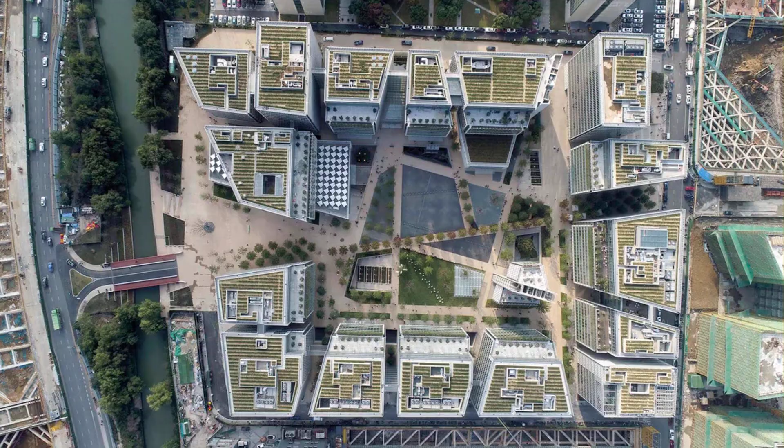Engineers responded with what engineers always reach for: bigger pipes, deeper tunnels, more pumping stations. And the floods kept getting worse. So China tried something that, when it was first proposed by landscape architect Kongjian Yu, struck most city planners as either decorative or delusional. Rather than building faster drains, retrofit cities to hold water the way a wetland does. So how did a country that paved its floodplains into oblivion attempt to turn its megacities into sponges? And what happened when reality tested the idea?

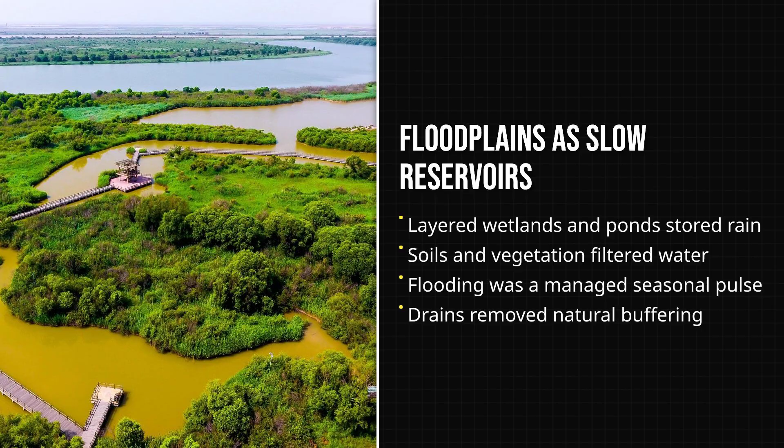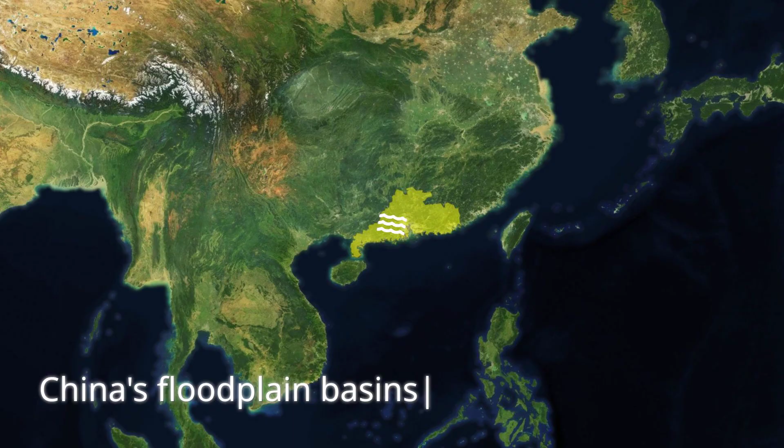Before Chinese cities were cities, the land they were built on did something that no drainage engineer has ever fully replicated. Natural floodplains were not flat, dry land that occasionally flooded. They were storage systems, layered with wetlands and shallow ponds that filled gradually during rain, then released water slowly over days and weeks as soil absorbed, plants transpired, and channels carried the overflow at their own unhurried pace. The Yellow River Valley, the Yangtze Basin, and the Pearl River Delta all developed over thousands of years inside landscapes that treated flooding as a controlled rhythm, not a catastrophe to be expelled.

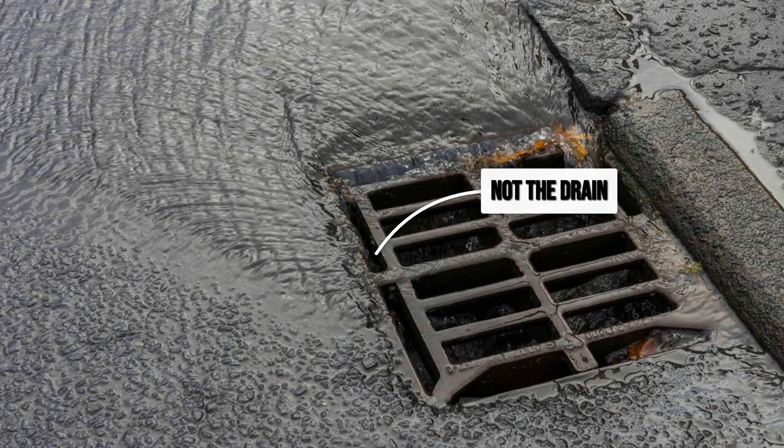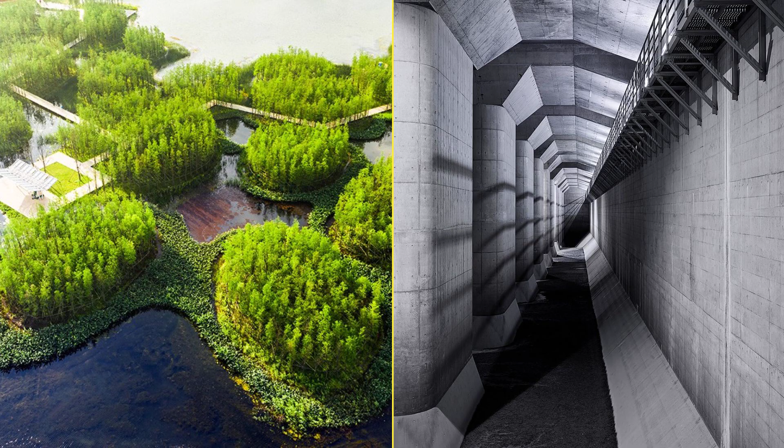Water moved through those landscapes slowly because it had places to go that were not the drain at the end of the street. It soaked into permeable soils that held it for weeks before reaching groundwater. It pooled in natural depressions that stored it through dry spells and released it through evaporation during heat. It filtered through root systems and wetland beds before entering rivers. Urban flooding became catastrophic not when rain intensified, but when that whole web of delays and detours was replaced with a single instruction: get the water out as fast as possible.

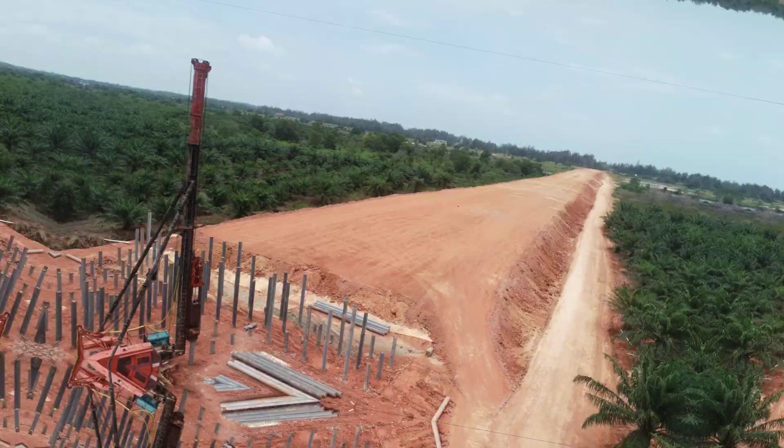The replacement happened with stunning speed. Between 1980 and the 2010s, China built more urban infrastructure than any nation in human history, and the tools of that construction were impervious. Wetlands were drained and filled to create developable land. Rivers were straightened, channelized, and walled in concrete to increase flood-carrying capacity and free the banks for roads and buildings. Permeable soils were sealed under roads and plazas designed to shed every drop of rain without absorbing any of it.

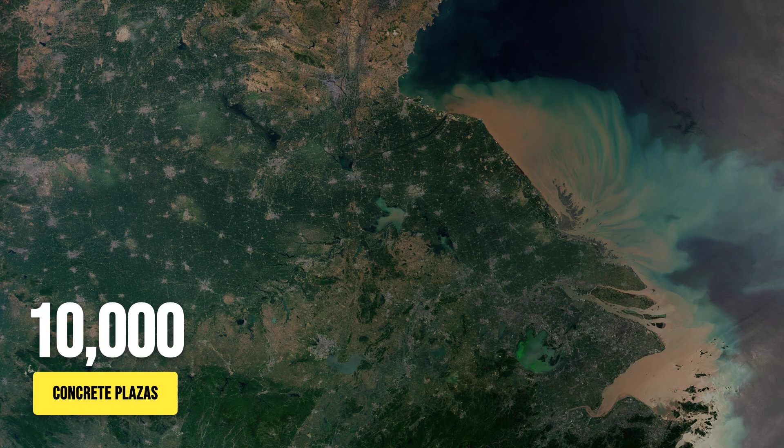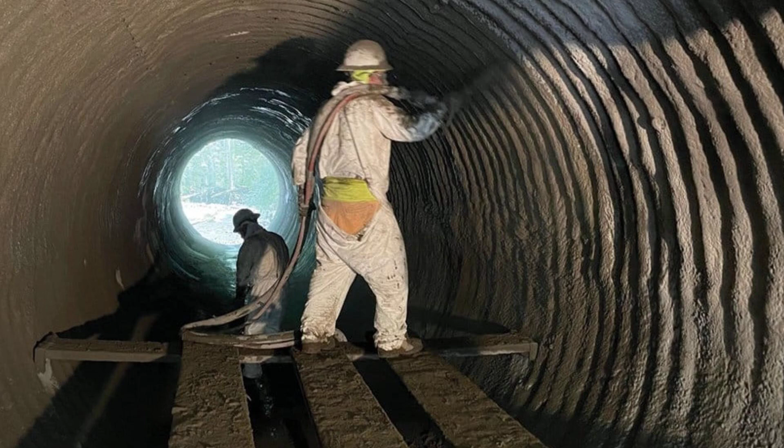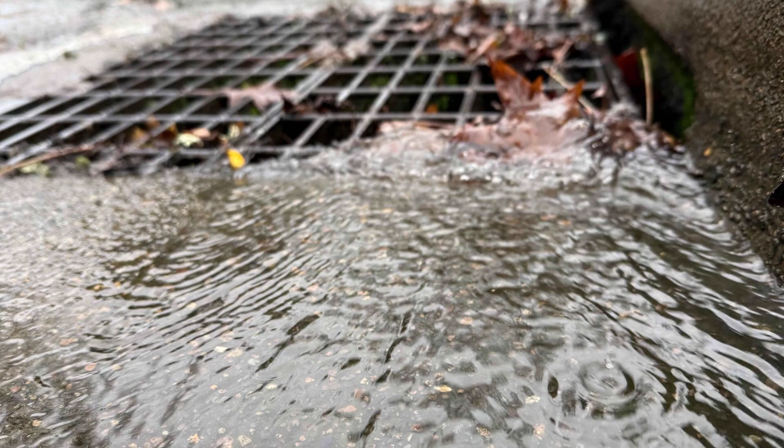A concrete plaza in front of a building meant no muddy ground, no flooded entrances. But 10,000 concrete plazas across a watershed meant that every storm sent its full volume into the drainage system at once, instead of spreading it across hours of gradual infiltration. Engineers built faster drains to keep up, which worked until rainfall was heavy enough that even the fastest drains could not keep pace with the surge they had helped create. The uncomfortable truth is that drainage design, as practiced for decades, protected individual parcels by pushing the problem downstream, and did so well enough that no one had to reckon with what was accumulating at the end of the pipe. By the time the reckoning arrived, it arrived loudly.

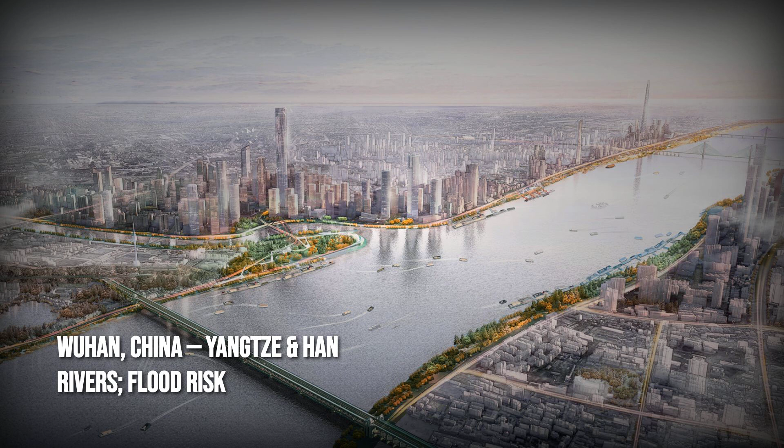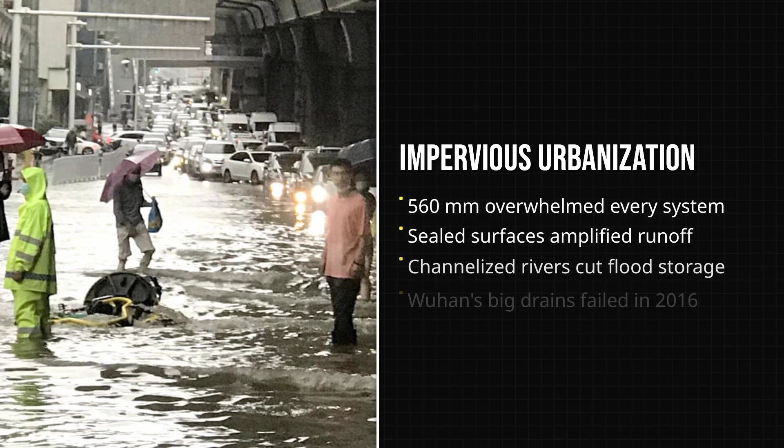Wuhan, a city of more than 11 million people sitting at the confluence of the Yangtze and Han rivers, built extensive drainage infrastructure throughout the 2000s and the 2010s. In July of 2016, more than half the city flooded anyway. A record weekly rainfall of 560 millimeters overwhelmed every system in place. Water levels in the Yangtze reached their fifth highest point on record. More than 1 million people were affected, and the economic damage exceeded 5 billion yuan.

Wuhan was one of the first sponge city pilots. Its experience was not unique. Across China's large cities, flood damage kept climbing even as drainage budgets grew, and the pattern was consistent enough that engineers had to confront an unsettling possibility.

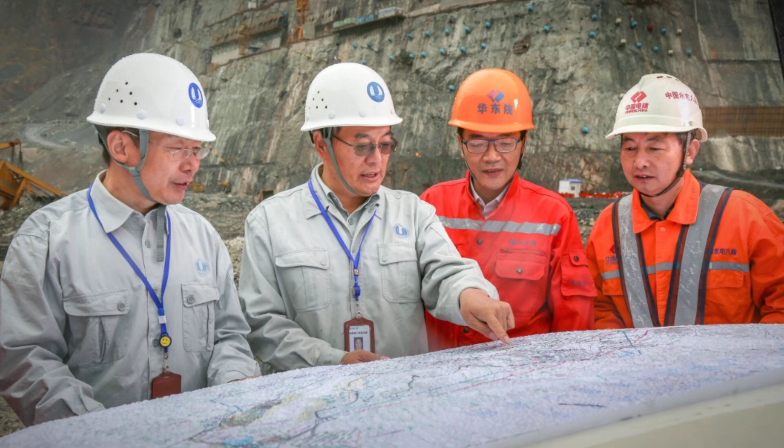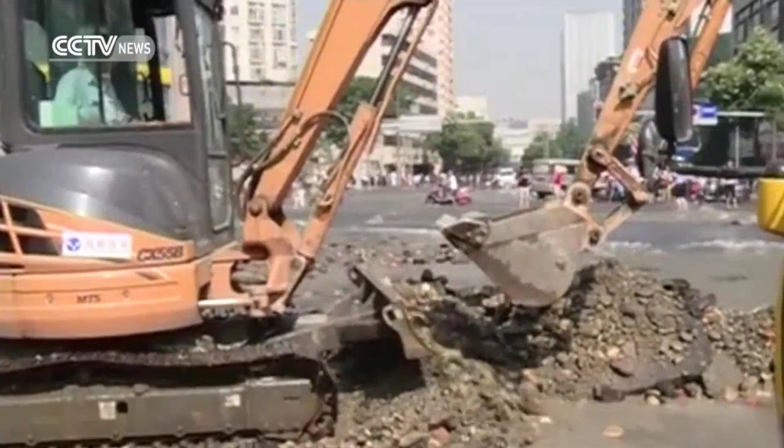The infrastructure they kept building was not failing because it was undersized. It was failing because it was the wrong kind of tool for the problem it was facing. Every fix solved yesterday's storm and failed the next one because the fundamental architecture of how water moved through the city had not changed.

When Kongjian Yu began arguing publicly in the early 2000s that China needed to stop fighting water and start accommodating it, the reaction from most of the infrastructure establishment was dismissal. The proposal was to retrofit urban environments with permeable pavements, sunken parks designed to hold standing water temporarily, constructed wetlands and retention ponds, green roofs, rain gardens, and bioswales, all connected into existing drainage networks to slow runoff, reduce peak flood volume, and release water gradually rather than all at once.

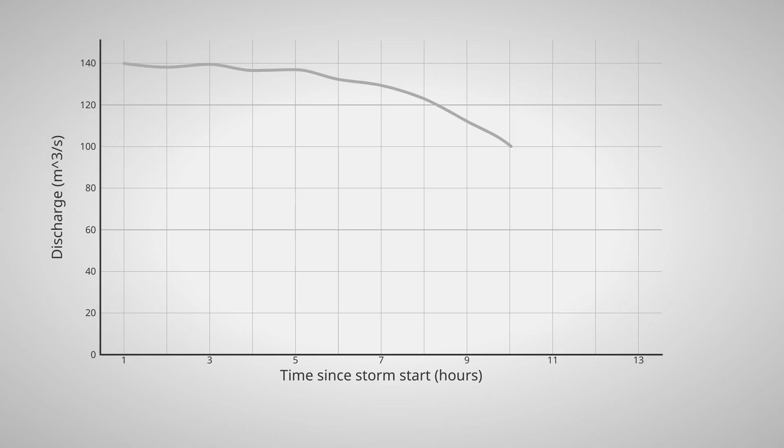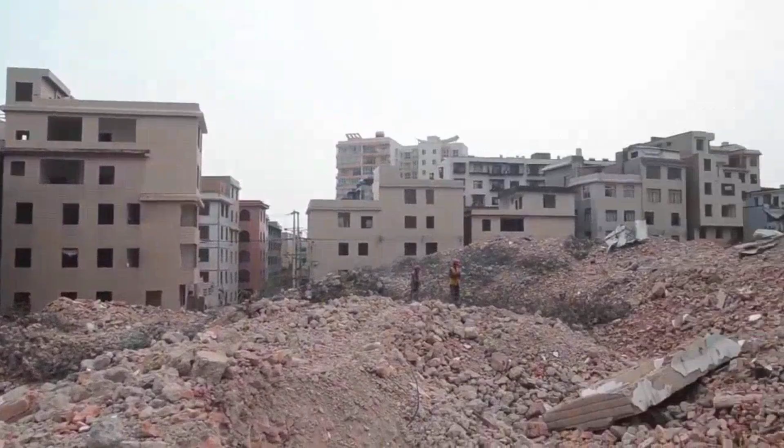Critics called it landscaping dressed up as engineering. Politicians worried that parks designed to flood would look like failures the first time they filled with water. Agencies with mandates to build hard infrastructure had no budget categories for gardens and porous pavement. And underneath all of the institutional resistance was a simpler objection. China's cities were growing, space was valuable, and dedicating urban land to nature-based water management felt like a step backward.

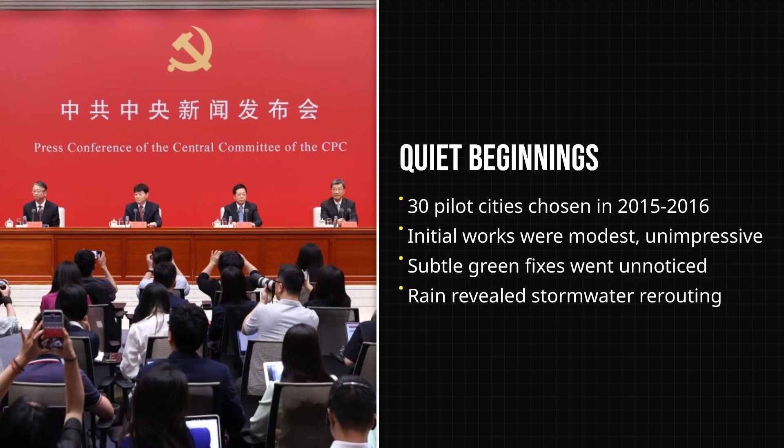If this gamble failed politically, the careers behind it would not recover. If it failed hydraulically, floods would still come and the money would be gone. In 2015 and 2016, China's Ministry of Housing and Urban-Rural Development selected 30 pilot cities and committed central government funding ranging from roughly 400 million to 600 million yuan per city per year for 3 years.

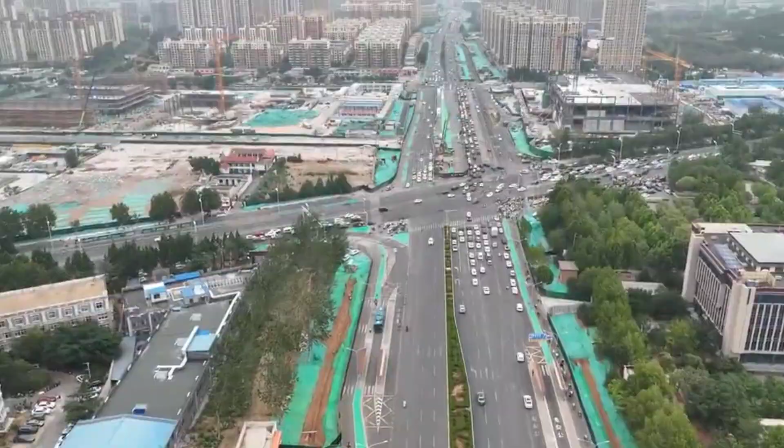Construction began. To most observers, what appeared on the ground looked underwhelming. Sunken plazas with gentle slopes, stretches of road resurfaced with unfamiliar textured paving, parks with shallow depressions and planted edges that engineers described as retention features, green roofs on public buildings. None of it was dramatic. Journalists who visited pilot districts early found it difficult to write a compelling story about what amounted to landscaping changes and road resurfacing.

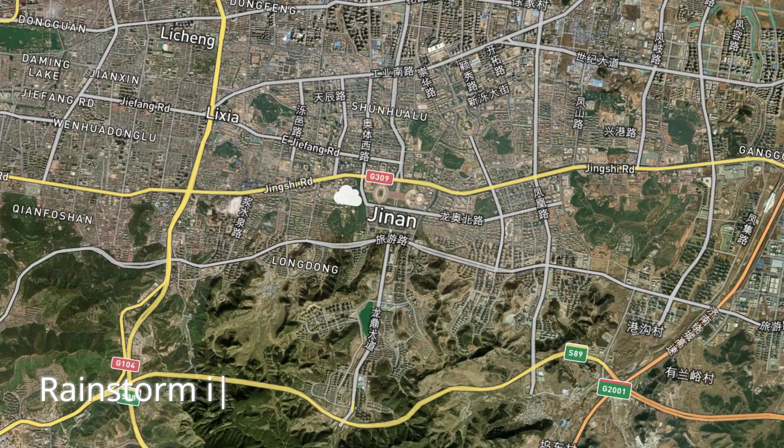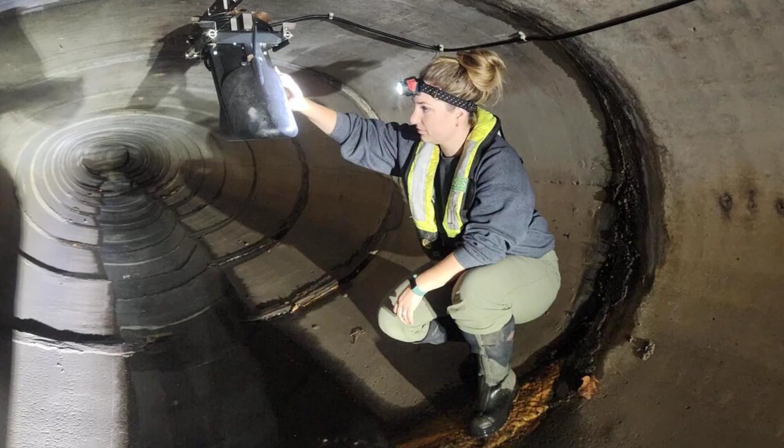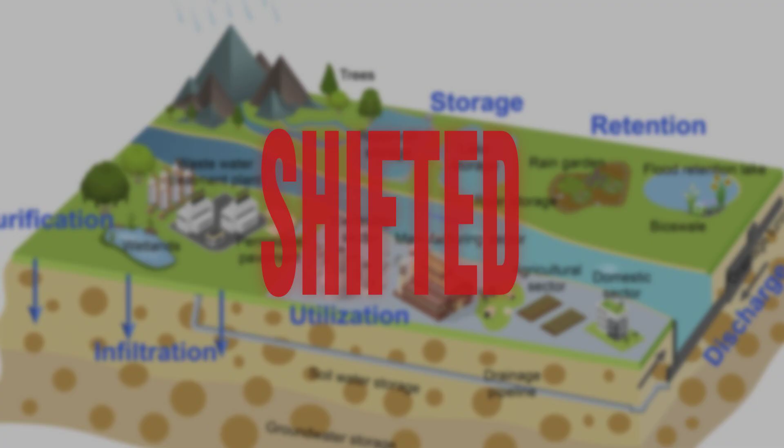Then, a moderate rainstorm passed through a sponge district in Jinan. A city drainage engineer watching from a monitoring station noticed something he had not seen before. The flow meters in the downstream pipes were barely moving. The water that had fallen on the district was somewhere else, soaking into gravel beds and pooling in depressions, and it was not arriving at the drain all at once. Something had shifted in the physics of how the storm moved through the city. The shift did not convince anyone quickly enough to stop the backlash.

In 2021, Zhengzhou flooded catastrophically despite years of sponge city investment, and the headline response was exactly what critics had predicted. The program was called a failure, a waste of public money, a project that had not solved the problem it promised to fix. Media coverage quoted residents who had watched sponge features constructed near their neighborhoods and still found water in their streets. The government acknowledged the damage, the death toll, and the inadequacy of what had been built. And the critics had a point, but not quite the one they thought they were making.

Zhengzhou's sponge infrastructure was built in specific pilot districts within a city of 9 million people. The rainfall event that hit it was far beyond what any urban drainage system is designed to manage, dropping a volume of water in a single day that approached the city's entire average annual total, hitting a watershed that had been sealed with concrete over decades. Sponge city features were never designed to handle that.

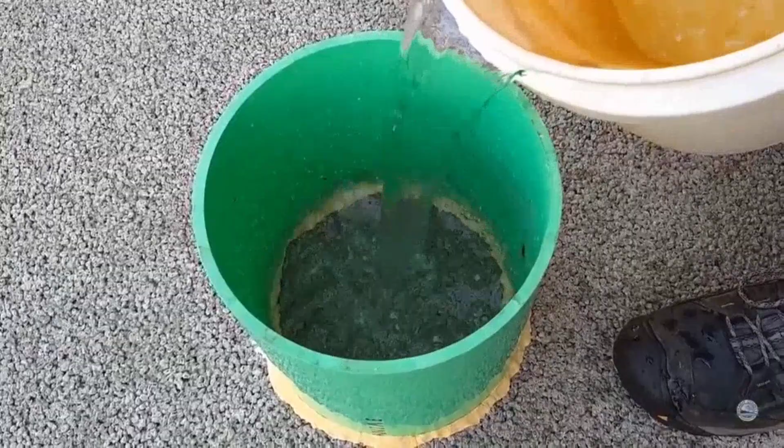The confusion, which was genuine and expensive, was between what the program promised to do and what people heard it say it would do. What sponge cities actually do is change the relationship between rainfall and flood peaks for the storms that happen most of the time. When rain falls on a permeable surface, a fraction soaks in immediately and the rest moves slowly toward the drain, arriving in a lower and longer pulse rather than a sudden spike.

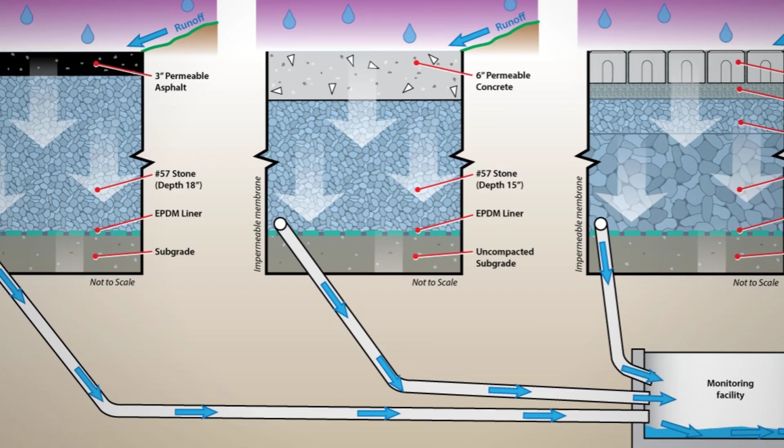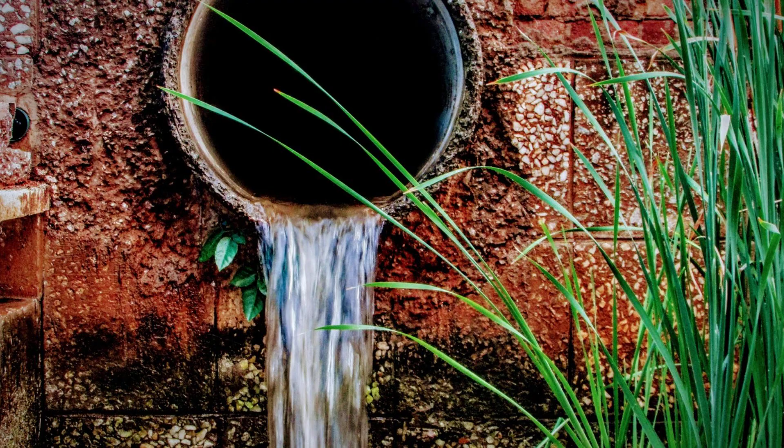Studies on permeable pavement installations in Chinese pilot cities showed peak flow reductions of between 7 and 43%, depending on storm intensity and installation quality. Sunken parks that hold standing water during a storm function as temporary reservoirs, releasing volume gradually as the storm passes instead of sending it all directly into already stressed pipes.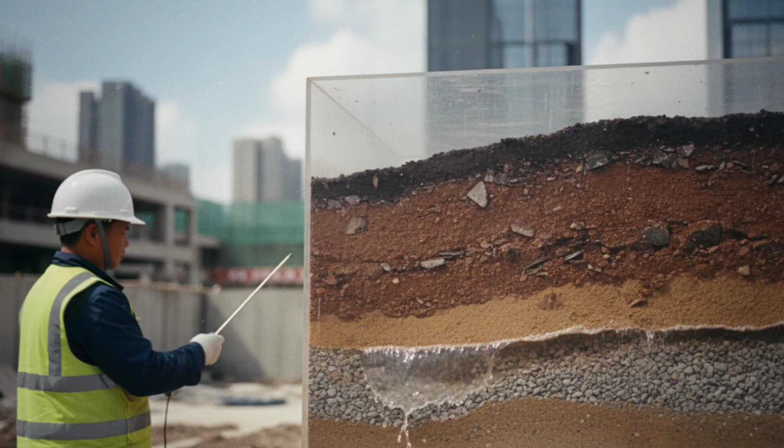Bioswales slow sheet flow along roads, filter pollutants out of runoff before it reaches waterways, and give water contact time with soil that sealed pavement never allowed. Each feature does something modest on its own. Across a retrofitted district, they reshape the storm from a sharp spike into a curve that the drainage system can manage, and the effect does not stop at flooding.

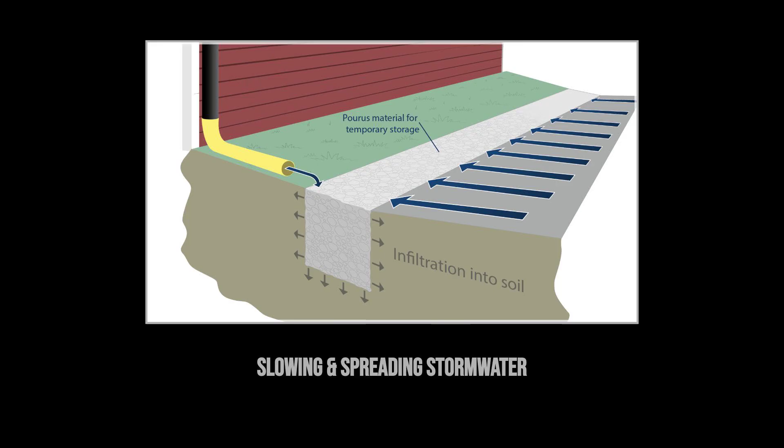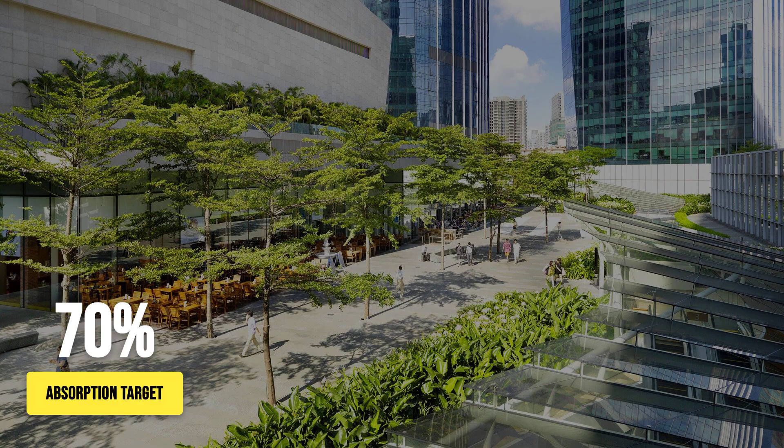Water infiltrating into soil instead of rushing into pipes recharges groundwater that cities had been depleting faster than rainfall could replenish. In sponge districts studied in Guangzhou, surface temperatures dropped by over 10 degrees Celsius in some cases compared to sealed adjacent areas, and air temperatures followed measurably. The city does not just drain better, it behaves differently in heat and drought as well as in rain.

After 5 to 10 years of operation across pilot districts, the patterns in the data became hard to dismiss. In Wuhan, more than 380 sponge projects covering parks, green areas, and urban gardens were associated with measurably reduced waterlogging during moderate and heavy storms in treated districts, along with improved water quality and documented biodiversity increases in areas near retention ponds and constructed wetlands.

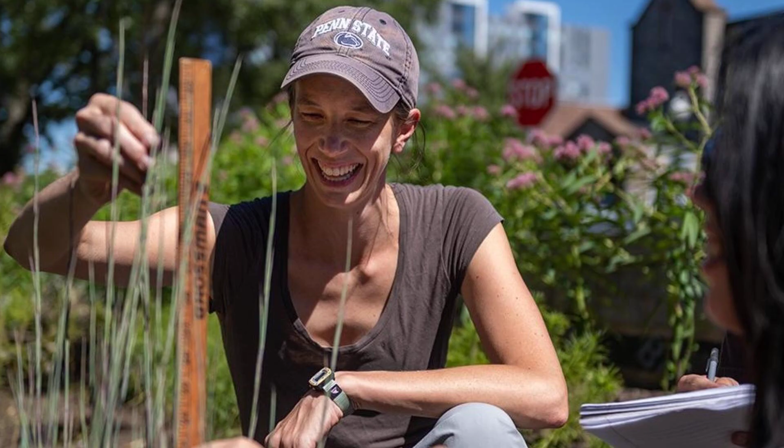A study published in early 2026 found that diversifying plant species in rain gardens and bioswales raised plant richness by more than 50% in pilot areas compared to conventional urban green spaces. In Jinan, investment in sponge infrastructure was credited with faster post-storm recovery in retrofitted neighborhoods, compared to adjacent areas still relying entirely on conventional drainage.

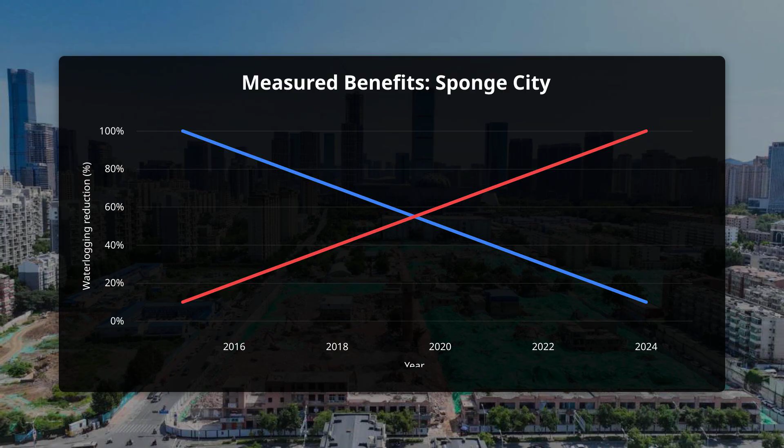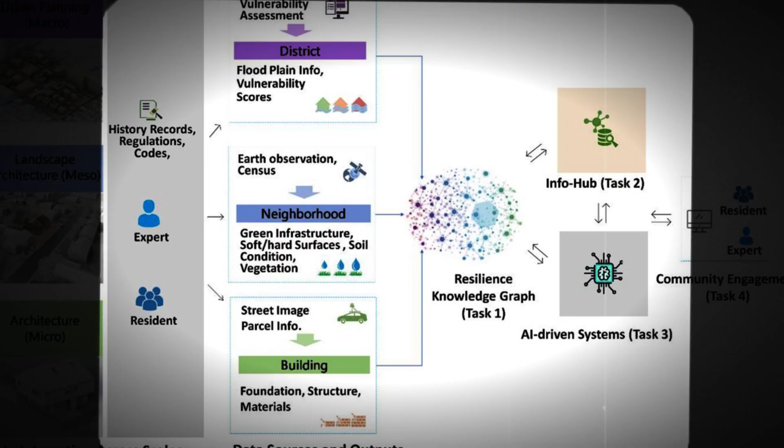A broader analysis measuring water ecological resilience across pilot cities showed consistent improvement in treated areas, modest in absolute terms but statistically repeatable across sites and years. The numbers arrived after engineers had already watched water move differently through the city, and the combination of observed behavior and accumulated data made a different argument than either the early optimism or the post-Zhengzhou backlash.

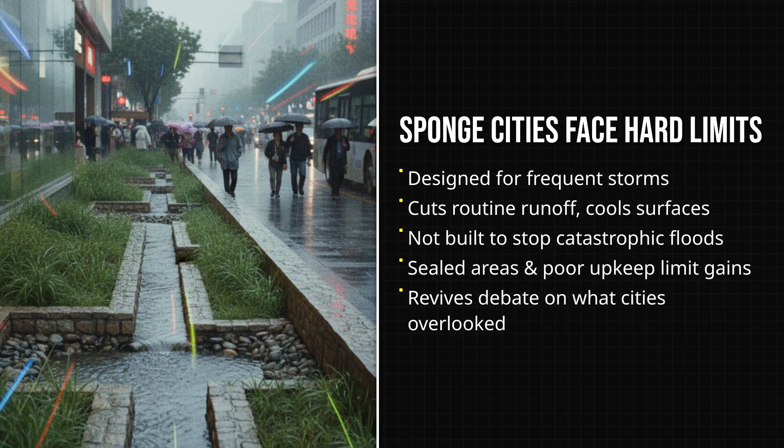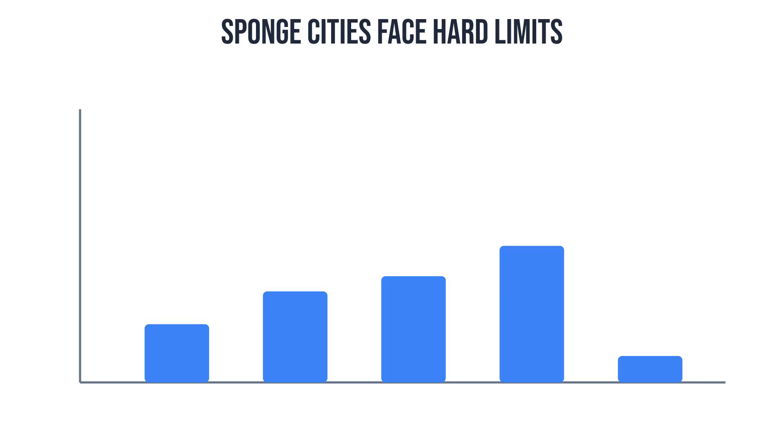None of this resolves the hard limits. Sponge city features are designed around storms that occur frequently, the common rains that account for most annual runoff and most chronic flooding. Against extreme events that are becoming more frequent as the climate changes, no amount of permeable pavement prevents catastrophic damage when rainfall volumes exceed the storage capacity of every feature in the system simultaneously. A city's flood risk is also shaped by river systems, upstream land use, and regional hydrology that sponge infrastructure cannot control from within city limits.

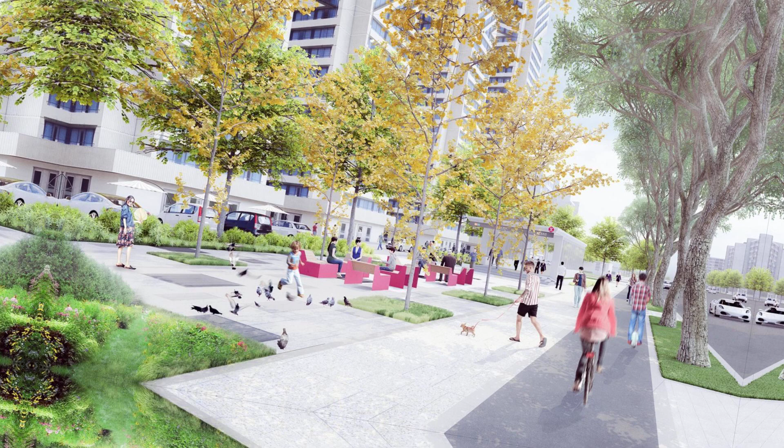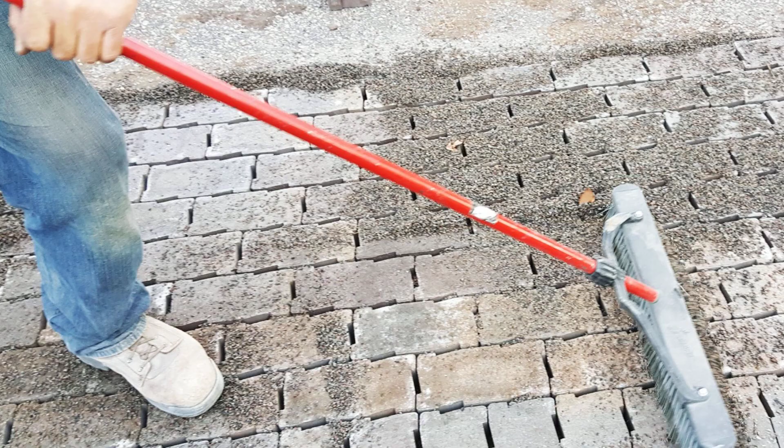Retrofitting existing urban fabric is slower and more expensive than building sponge features into new development, and most of China's urban population lives in districts that were sealed under concrete before the program existed. Maintenance matters enormously. Permeable pavements clog as fine particles fill the voids, and installations under poor maintenance conditions lose more than 60% of their runoff reduction effectiveness compared to well-maintained ones. And the political cycle of funding, attention, and accountability that produced the program's early momentum is not guaranteed to sustain the decades of maintenance and expansion that meaningful results require.

What China's Sponge City program actually demonstrates is smaller and more important than its most ambitious claims. It shows that cities can restore, inside their own boundaries, some of the hydrological processes that were erased when floodplains were sealed. Not all of those processes, not enough to stop extreme events, but enough to change how ordinary storms behave in ordinary years, and enough to improve the water quality, temperature, and biodiversity of the urban fabric in ways that compound over time. The program did not make China's cities flood-proof. It started making them slower to fail.

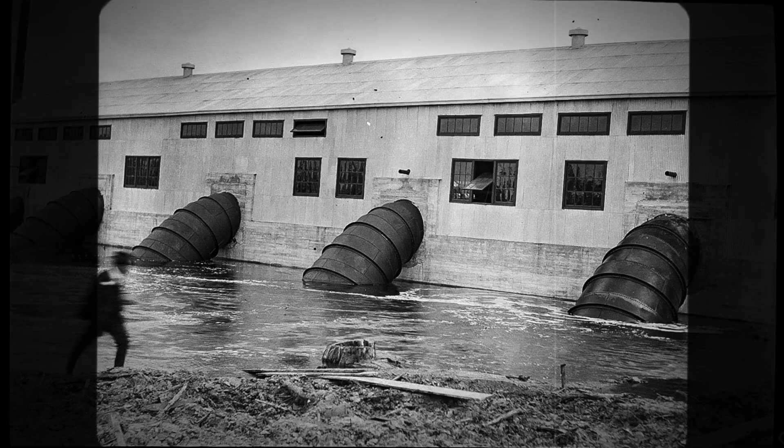And the question that the data leaves sitting quietly in the background is not really about China or about floods. If cities were engineered for a century around the single priority of shedding water as fast as possible, moving it away and out and downstream at every opportunity, what else have we optimized in the wrong direction without yet building up enough damage to notice?